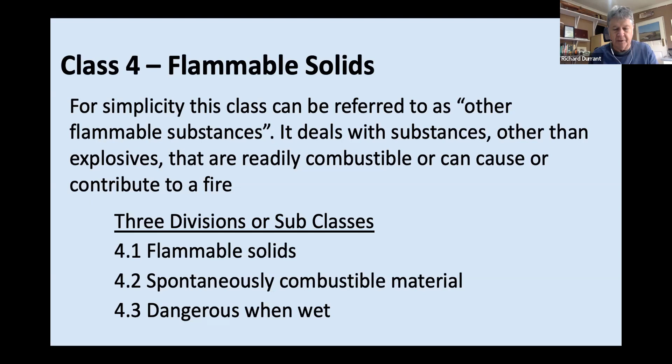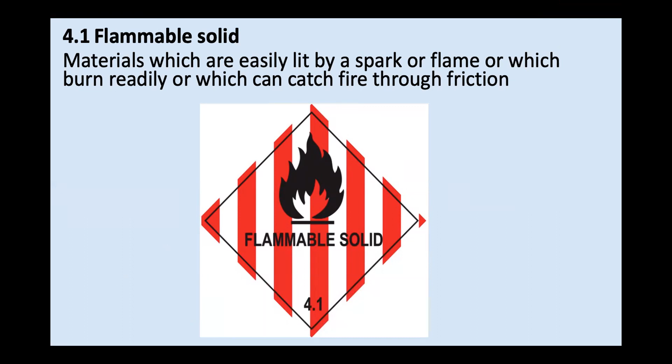If we look at the flammable solids initially, the definition is materials which are easily lit by a spark or flame, or which can burn readily, or which can catch fire through friction. So readily lit by a spark or flame, burn readily, and catch fire through friction.

On the screen is the hazard warning diamond for flammable solids. Very distinctive sign. As I've said in previous sessions, over time that 'flammable solid' text written on the pictogram or diamond will fall away, and it will just have the flame and the red bars, and the 4.1 at the bottom. Sometimes it might not even have 4.1; it might just have a 4, telling you that it is a class 4. But for now, that's the hazard warning sign for flammable solids.

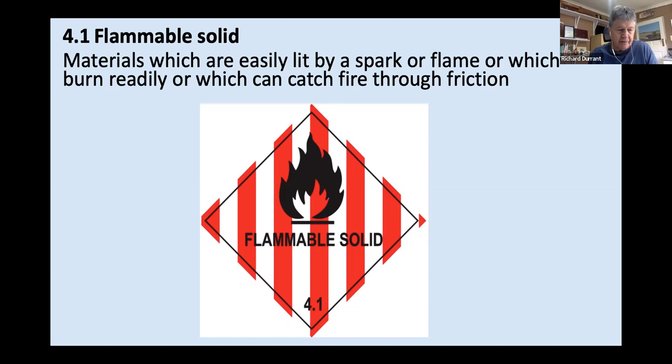In my presentation, I'm not going to go into a lot of detail about the transport directly, but I'm going to go more into the products and the risks and the hazards of those products, which relate back to the transportation. So we'll spend more time looking at the actual products and then get on to some of the issues around the transportation.

A very busy slide, but this was I felt the best way to describe some of the products. I want to give acknowledgements to Foresight Publications for the table shown here. If you need information on transport of dangerous goods in South Africa, they produce what they call the South African Orange Book. It's quite a manual of documents, a summary of a lot of our SABS SANS standards, as well as including some United Nations requirements. If you are getting into it, it might be worth acquiring one of those documents; it's a very good handbook. So this information is out of their handbook, or their Orange Book, as they call it.

If we just look down, we're not going to go through all of them, but just to give an example, the very first one is camphor. It's UN 2717. It's used as a moth repellent, and it's also used in the manufacture of plastics, lacquers, and paints.

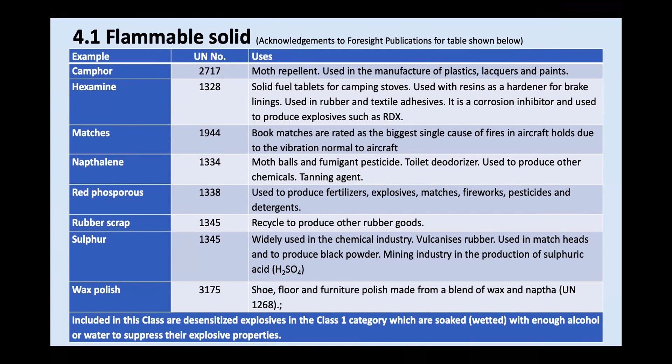Right at the bottom, flammable solids included in this class are desensitized explosives in the class 1 category — explosives which are soaked or wetted with enough alcohol or water to suppress their explosive properties. I'm not an explosives expert, but yes, explosives could also be categorized as flammable solids.

So I'll go on to some examples of these a little bit later.

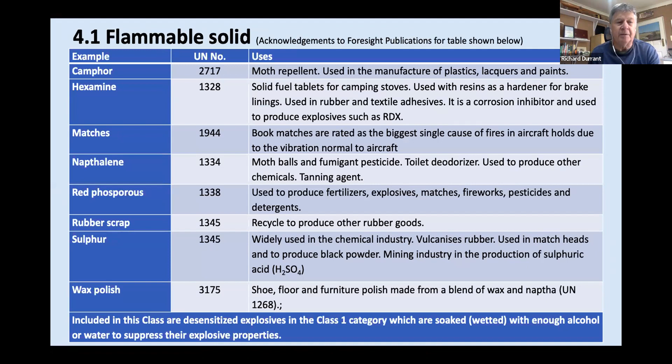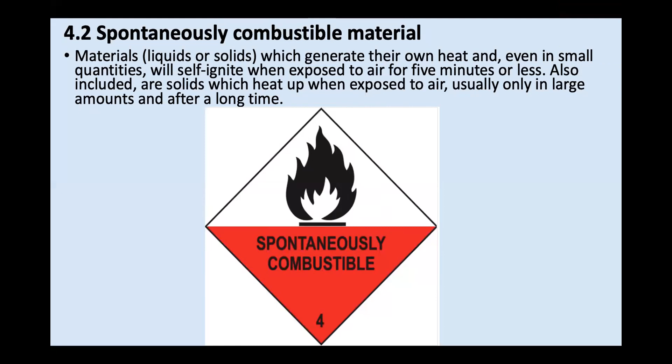If we go to the next category, your 4.2, spontaneously combustible materials, which are materials, liquids or solids, which generate their own heat and even in small quantities will self-ignite when exposed to air for 5 minutes or less. Also included are solids which heat up when exposed to air, usually in large amounts and after a long time.

So spontaneous combustion, the hazard warning diamond - again, this one just shows it as a class 4, but very, very different from the last one, but also very distinctive of diamond, let's call it branding for this material.

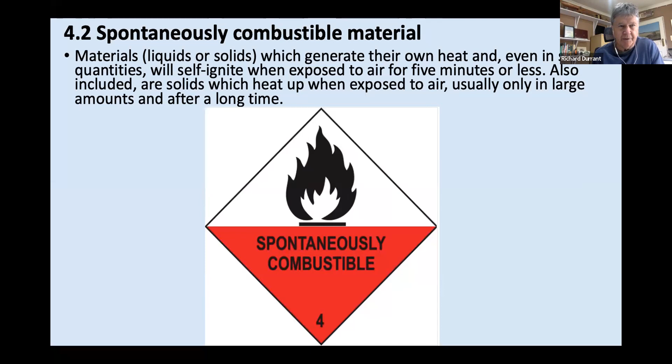Cotton waste, waste materials, again, packed together, could generate heat, they could ignite themselves.

Fish meal - we have a large fishing industry in South Africa. The meal that comes out of the waste, or let's call it the offcuts, which then goes into fertilizer production, can also be spontaneously combustible.

Metal shavings, which seems strange, but there's often oil on the metal shavings, and so that can also lead to spontaneous combustion.

Oil and seed cake, similar - it's got an oil content to it.

Sodium sulfide - I don't know sodium sulfide too well, but it is used in the removal of hair from hides in the tanning industry. And white phosphorus, which is used to make phosphoric acid and other chemicals used to make fertilizers and also in military use.

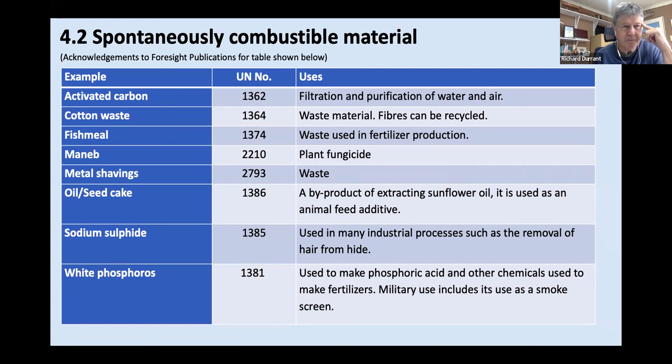Then dangerous when wet are substances which on contact with moisture may catch fire by themselves, or which may emit flammable or toxic gases. Again, a very distinctive diamond, marked as a class 4.

UN1402 is a source of acetylene. They use acetylene a lot in welding and in steel making. When it comes in contact with water or moisture in air, calcium carbide rapidly evolves acetylene - it produces acetylene, a highly flammable gas which may be ignited by the heat of the reaction.

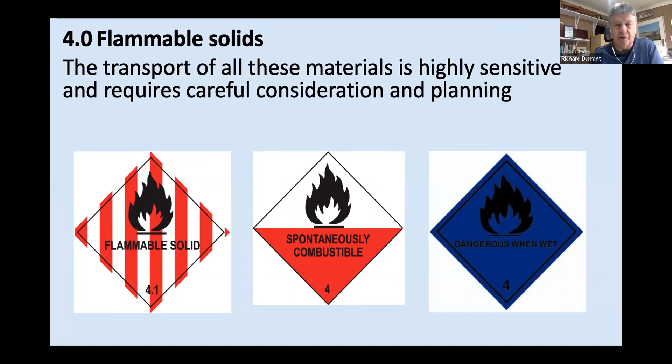So really, from a transport point of view, all these products are highly sensitive and require careful consideration and planning. Just a word of warning: don't rush in and start trying to transport or handle these products without understanding the implications, the risks of these products. Otherwise, you could be getting yourself into trouble. So be very aware of those pictograms, and take due caution before you jump in and start getting too involved with them.

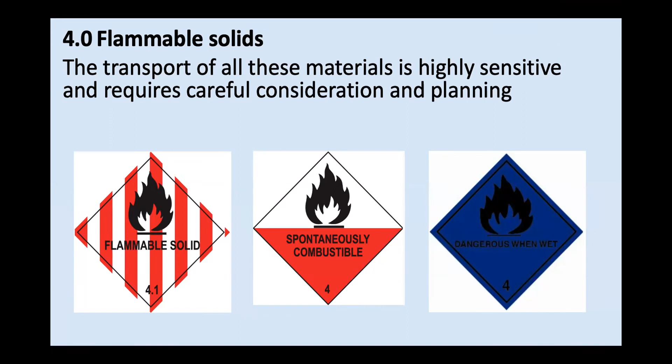So some of the modes of transport - these are just some examples. Dry bulk tankers, which I'll explain in some detail shortly.

Your drums and packages, similar to what we've spoken about before. We've spoken about liquid tankers before. We haven't spoken about dry bulk tankers - very different equipment, and I will go into a bit more detail on that one now.

So you have your standard flat deck trailers, which can be used to load granular products, either in bags or drums, normally - your normal run-of-the-mill flat deck trailer or interlink. That's what most of us would know as a standard looking trailer.

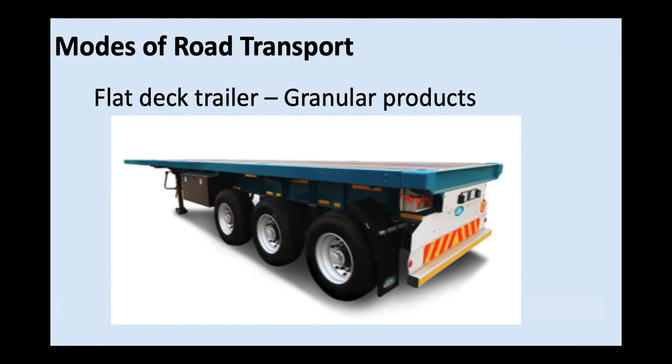Then there's sulfur, which also goes onto flat deck trailers. I want to go into a little bit more detail on sulfur.

Sulfur has a UN number of 1345 and is a class 4.1. As we said just now, these are materials which are easily lit by a spark or flame, or which burn readily, or which can catch fire through friction.

So sulfur is widely used in the chemical industry - vulcanizing rubber, match heads, etc., as we said just now - and the mining industry uses it in the production of sulfuric acid. So the second bullet point is around the mining industry.

And it's used for the production of sulfuric acid, but as well as the extraction of copper. So it goes into that. A lot of the sulfur that we have in, I'm going to say, Southern Africa, some of it is imported through the port of Richards Bay, and other sulfur is manufactured by Sasol in Secunda.

It is generally packed into 1-ton bulk bags. On the right of your screen is just a little example or picture of what bulk bags are. They're normally a 1-ton capacity. The product is loaded loose into those bags. And once these bags are loaded onto the trucks, they're normally transported to Zambia and to the DRC on a backload basis for copper being exported out of Durban.

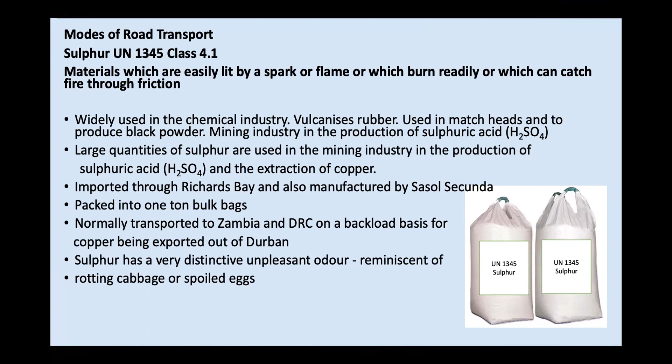So the copper is coming out of the copper belts in Zambia and DRC down to Durban. Some of it goes to City Deep in Johannesburg and then gets put on rail. Some of it goes straight to Durban for export. And then those transporters that have taken the copper down, some of them will go up to Richards Bay to load sulfur. Others will come back to Secunda to load sulfur out of Sasol. And that goes back to the mine. So it's a nice back-to-back backload situation in most instances. Not all, it's not a 100% match load for load, but it does help to reduce the costs on being able to do backloads.

If you travel, I was in Polokwane on Friday. And if you're traveling on the N1 up towards Polokwane, between Pretoria and Polokwane, often you'll get a smell, very distinctive, unpleasant odor. And the information I have, it's reminiscent of rotting cabbages or spoiled eggs. But I think that's more your liquid sulfur.

The dry sulfur has got a very acrid, I don't know if that's the right term, but it's a very distinctive, unpleasant smell. So if you're driving along and suddenly you smell this unpleasant, harsh smell, there's a very good chance you're either behind a truck that's transporting it or a truck that is actually traveling in the opposite direction to you. And so you'll know when you smell it, because it's a very, very distinctive smell.

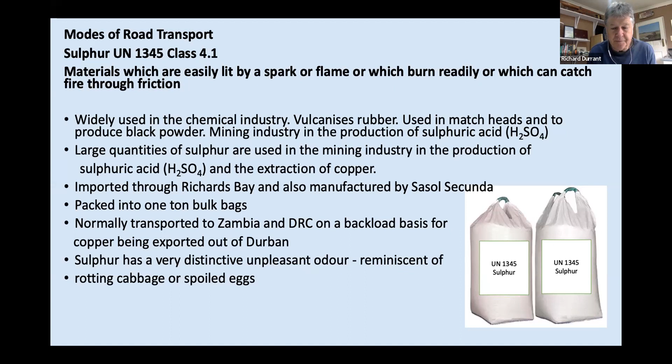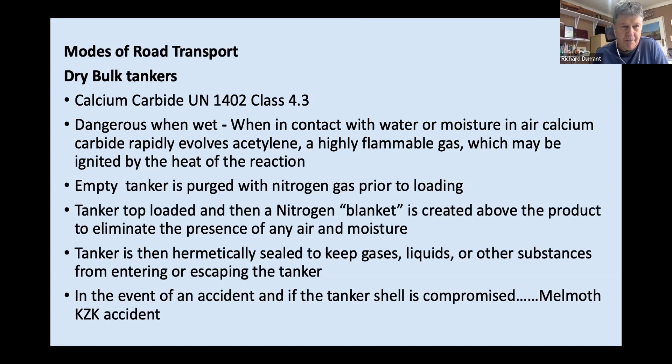Maybe Richard, yeah, carry on. Before we proceed, I'm not sure if anyone has got any questions, because this is very critical. Richard, with some of the entrepreneurs, and also in corporate, when we recruit a lot of schedulers, logistics managers, the typical kind of experience necessary in managing this is very crucial because of the nature of the business, and when people think around the example you've given us, that's when people start shying away from the industry.

Richard, just tapping onto the example and some of the product streams that you have shared. I like the example you used in terms of sulfur and the backloads. I know everyone that focuses on cross-border business, and I like that you used DRC, where there's a lot of mines, and Zambia, where there's a lot of mines as well. From the cross-border perspective, people are always wary around the backloads.

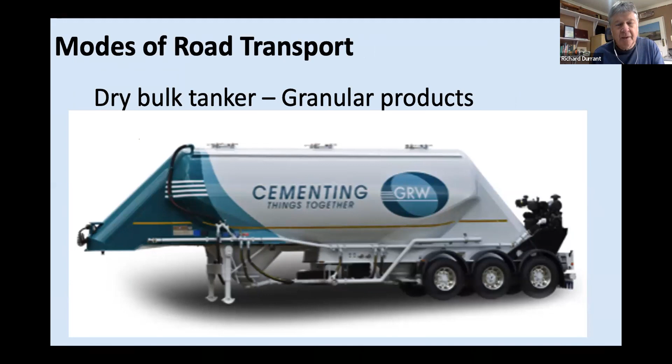So again, with your calcium carbide, they'd fill that drum. They would then, and I'm not sure how they'd do it, purge all the oxygen out, put the lid on, and clamp it up so that it's an airtight seal. And that's the other method that they transport calcium carbide. One's in bulk, and the other would be in that sort of container. And I would imagine a lot of your other products would go in similar, but that's the one I'm aware of.

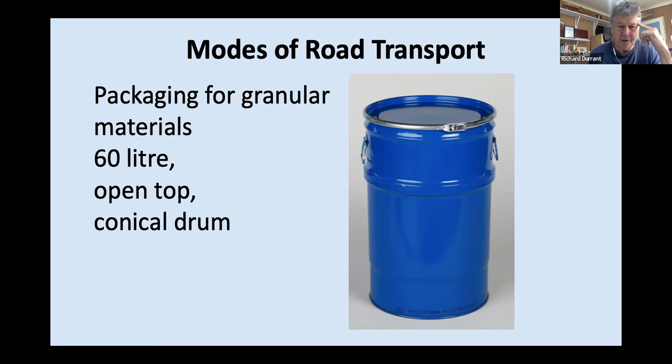So there's a whole process to get that UN approval. There's only one packaging company in South Africa that is UN approved, or can manufacture UN approved packaging. So it's a very specialist field. That package, before it can go into production, goes through drop tests and water tests and all sorts of things, depending on what it's going to be carrying. So it is a very intense process. It's not just a box. It's a box which meets a large number of requirements.

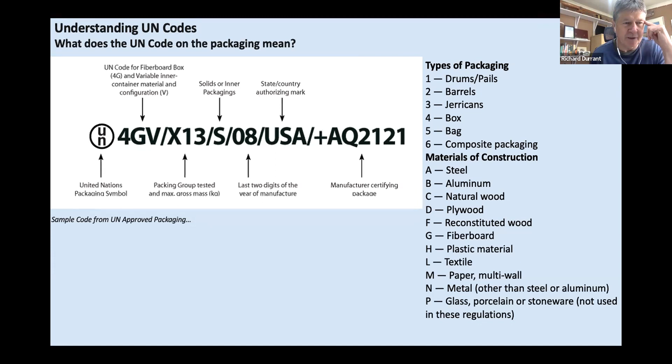And then it continues: the X in the second group is your packing group for 1, 2, or 3, or if it's a Y, it's only 2 or 3, or Z, it would only be for packing group 3. Then the 13 would be your gross weight, and then there's year of manufacture and origin, so quite an involved process.

So it's not directly related to you as a transporter, but if you're going to be transporting dangerous goods in package form, you need to make sure that your supplier is giving you the products in this approved packaging. Otherwise, you may land up with a risk of damage or fire, and then your insurer might turn around and say you didn't follow the requirements, so your claim has been repudiated. So it's always something to bear in mind before you jump into transporting dangerous goods. Make sure you've covered all your bases.